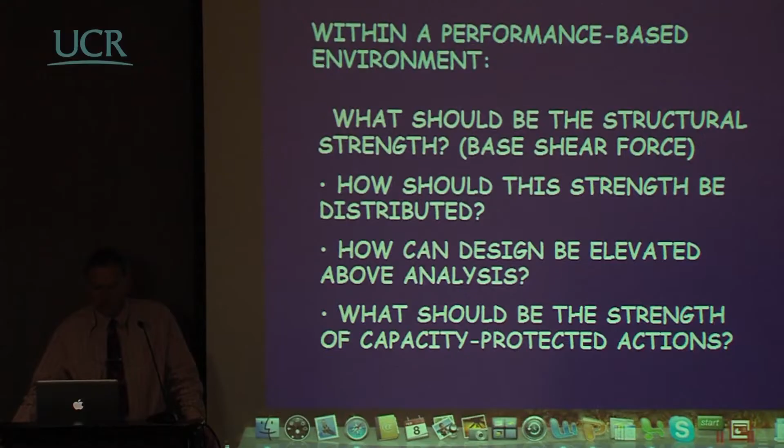So the title, of course, we have here. Essentially what we're going to be discussing is that within a performance-based environment, what should be the structural strength, the base shear strength, if you like, of a building, and how this should be distributed through the structure in a way that is different from what we do at the moment, but which creates the best seismic performance.

How can design be elevated above analysis? Because there has been a trend in the last 30 or 40 years, with the advent of such powerful computers as we use at the moment, for the design to be governed by analysis, which is completely the wrong way around. Analysis should be used to verify designs which come from a logical interpretation and from the experience of the designer, and not be dictated by analysis, which, as we will show, generally cannot be done adequately at the start of a design because we do not have sufficient information.

Also, we need to discuss how the strength of capacity-protected actions should be done. In other words, we will talk quite a bit about recent developments in capacity design. This is ensuring that you don't get plastic hinges forming where they should not form, and ensuring that undesirable inelastic modes of deformation, such as shear failure, should not occur.

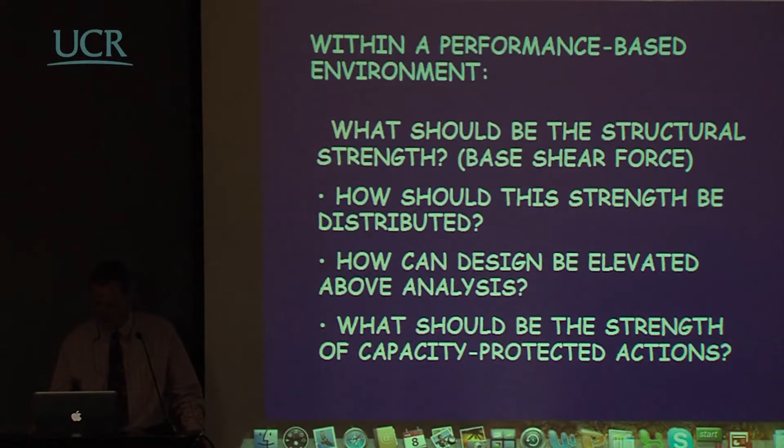And the basis for this is a book which has recently been written, in which Michele and myself are the principal authors, but I would also like to acknowledge the contribution of our co-author, Professor Kowalsky from the University of North Carolina, who really should be the one here because he speaks Spanish, and then we wouldn't have to have the translations.

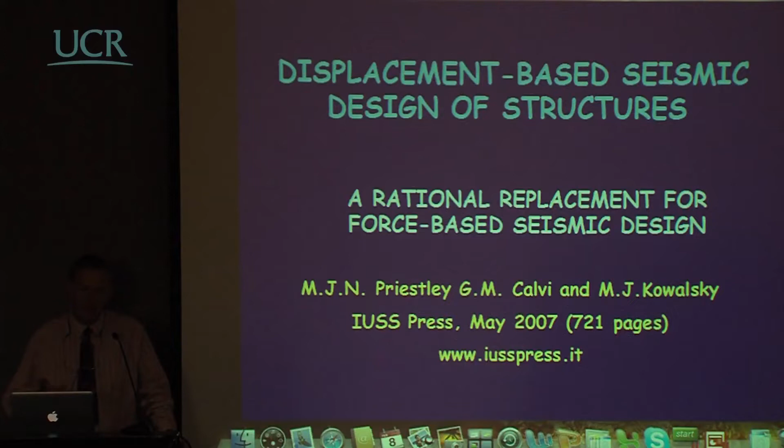Anyway, this book is a fairly major book. To my mind, it's the most important book that I have been involved with, because of the way in which it describes a complete new process for seismic design.

This first session is introductory. I'd like to give a brief overview of the book itself, what the chapters are, because we will not have time in the presentation to discuss the entire book. But I also want to spend this session discussing what's wrong with the way we do seismic design at the moment, to look at some of the assumptions we make, and to try to persuade you that these assumptions are invalid and can result in very great inaccuracies in our design.

So the book itself is a culmination of more or less a 15-year research effort into the development of a new, rationally based, but particularly simple seismic design procedure. By simple, I mean it's more or less equivalent to the old equivalent lateral force single-degree approach that we used in force-based design. A single degree of freedom system, but not one where we lose any accuracy, because we describe the response by the fundamental inelastic mode of response.

It's performance driven. In other words, we describe the performance in terms of limit state strains or limit state drifts, and design the structure to achieve those particular limits, which might be serviceability limit state, damage control, failure, whatever you like. It covers a wide range of structural types, as you'll see shortly, and a wide range of structural materials: concrete, steel, masonry, timber, precast.

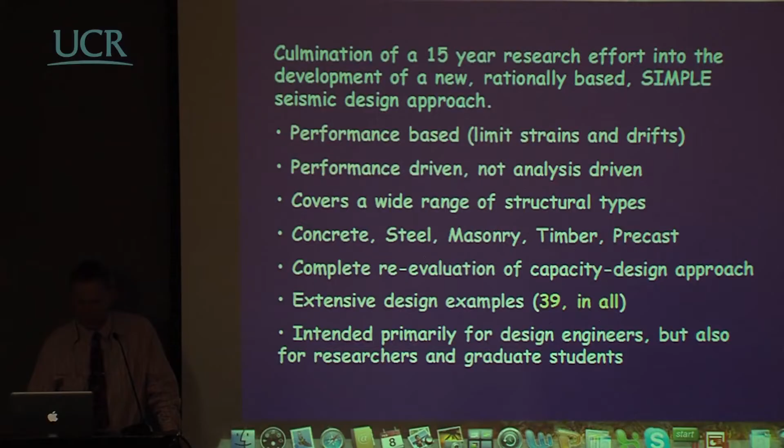I'll briefly go through each chapter, just showing what it has in it in a very brief sense. Chapter 1 is an introduction, which discusses the problems with force-based design and establishes why it's necessary to change from current force-based design processes.

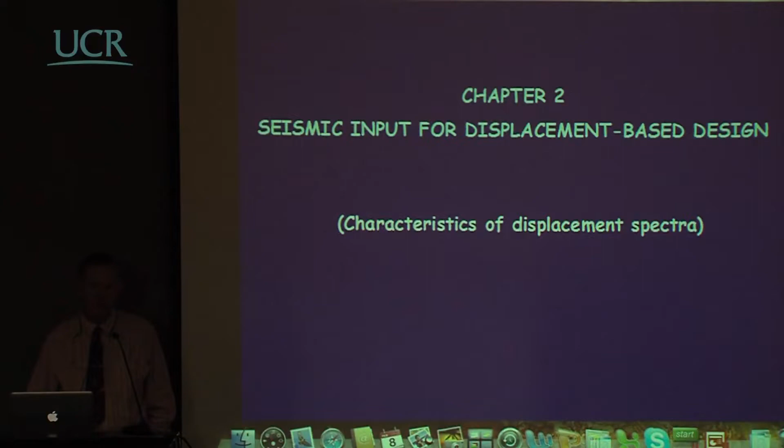Chapter 2, discussed in the second session, looks at the seismic input for displacement-based design. We don't use acceleration spectra, we use displacement spectra such as these. They tend to be very simple in form, but we'll show that we can develop these directly from source mechanisms rather than necessarily the way we have them in codes.

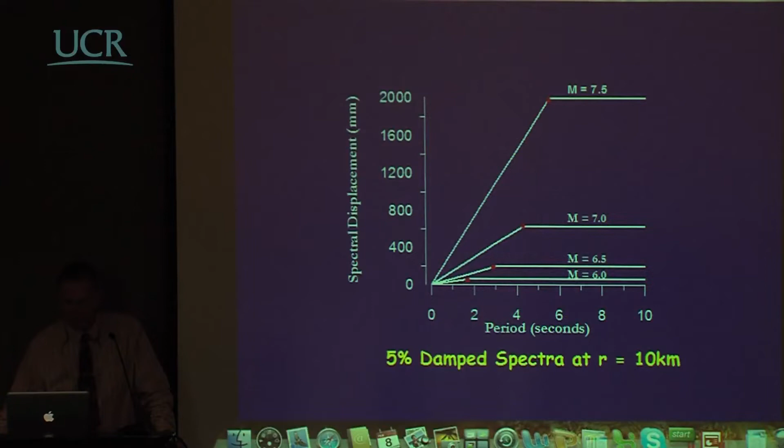This shows different spectra for different magnitudes of earthquakes at 10 kilometer distance, and you can see there's a very great deal of difference in the displacement spectra for a magnitude 6 and a magnitude 7.5.

We'll also look at the influence of viscous damping on this, because we describe structural performance in terms of equivalent viscous damping rather than just ductility. We have differences between the displacement spectra for what we might call normal conditions and other ones where forward directivity and velocity pulse conditions govern.

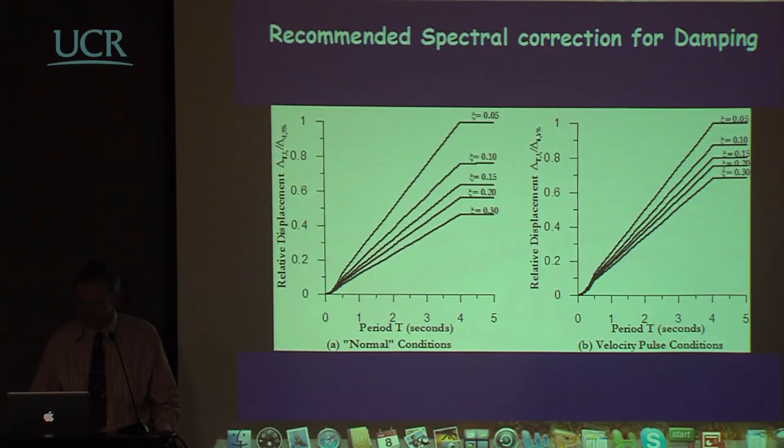Chapter 3, also dealt with in the session, looks at the fundamentals of the procedure itself. It sets the mathematical and logical background for direct displacement-based design and discusses philosophical differences between the force-based and displacement-based approaches.

There's a lot of additional information about things such as P-delta effects, how we combine gravity and seismic loads—and I hope to persuade you that we don't need to combine them, we can design for them independently—and various other aspects such as torsion and capacity design principles.

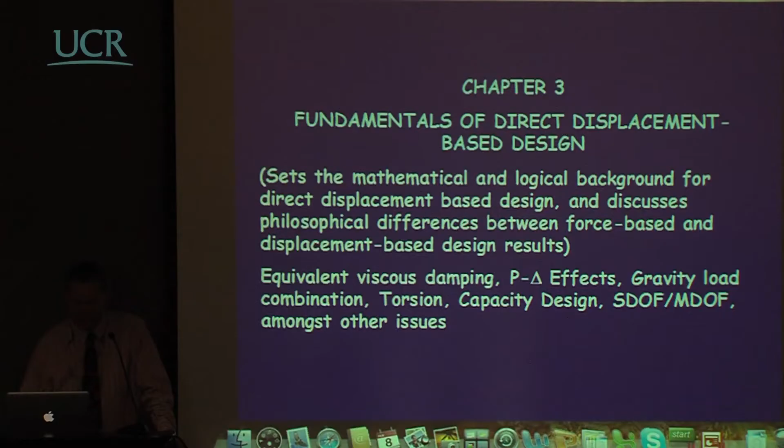Chapter 4, which we'll discuss a little at the very end of the seminar, deals with analysis tools for direct displacement-based design. One thing I should emphasize is that the book, for those of you buying this, also comes with a CD at the back.

The CD has a number of computer codes on it for different types of analysis: a program called CUMBIA, which does moment curvature analysis, and two dynamic inelastic time history analysis programs, Ruaumoko and SeismoStruct. These are quite valuable to design engineers because they enable you to do quite complex structural verifications if you need to.

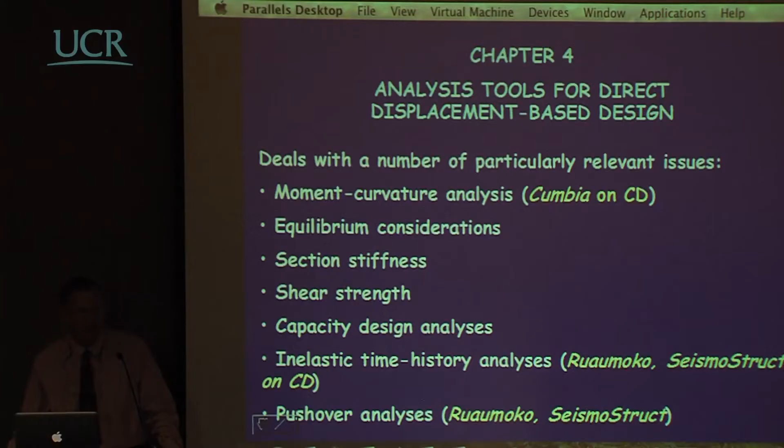We'll look particularly at equilibrium considerations, tending to use equilibrium rather than stiffness-based structural analysis to determine the distribution of forces. There's not much point doing a stiffness-based analysis at the start of a design when you don't know the stiffness of the members, and anyway it distributes forces through the structure incorrectly if based on elastic analysis when the structure is responding inelastically. Also information on shear strength and capacity design and so forth.

Chapter 5 is a detailed chapter on particular aspects of frame buildings that might be of interest to the designer, and we'll talk about that in the first session tomorrow morning.

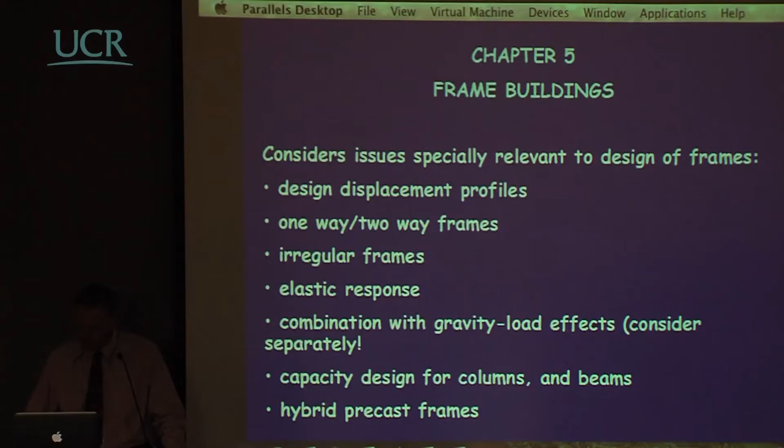One of the things we will look at is structures which might respond elastically to the design level earthquake. We'll show that from a displacement-based point of view, particularly in regions of moderate seismicity, many structures can be shown to respond elastically to the design earthquake no matter what strength you put into them. This can simplify design.

This diagram compares yield displacement, shown by dotted lines, of frame structures of various heights with the designed maximum displacement for earthquakes of different peak ground accelerations generated by different moment magnitude earthquakes.

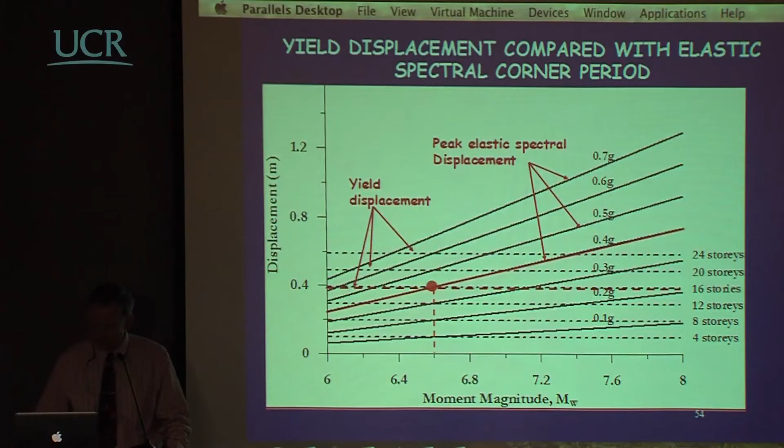A little time will also be spent on coupled wall design, an aspect of structures which cannot be dealt with adequately by elastic analysis. The results you get from elastic analysis of coupled wall structures have no bearing on what is going to happen to the structure when subjected to the design level earthquake. Whereas by displacement-based design, we can come up with a very logical structural system that performs very well.

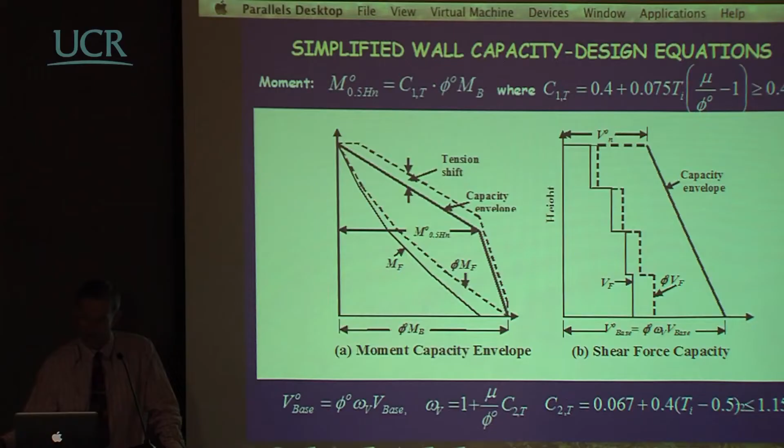Part of the aspect is re-looking at capacity design equations, here shown for moment capacity and shear force, and we'll show that in order to protect against shear failure in structural walls, we have to be a little bit more careful than we have been in the past.

We also deal with dual wall frame buildings. We'll spend a little time on this. The behavior is very similar to that of coupled wall buildings, and pretty much the same aspects are considered.

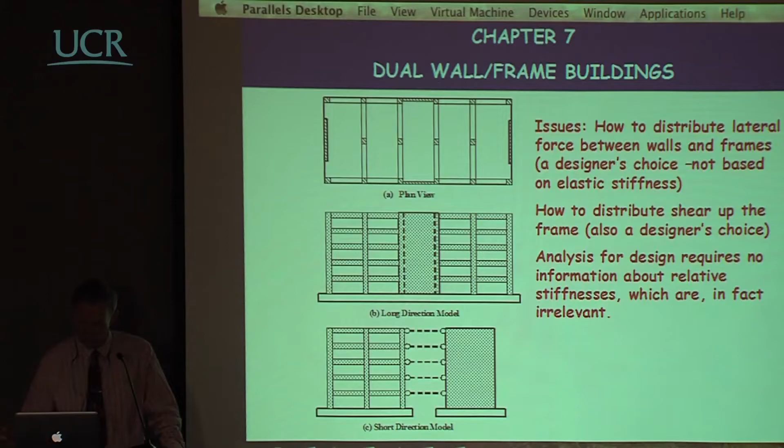The most important thing in both of these cases is that the designer, at the start of the process, makes a conscious decision about what percentage of the lateral force is going to be carried by the walls and what percentage taken by frames. It's not something you can get logically from a structural analysis, but there is no reason why you shouldn't make your own decision about this based on experience.

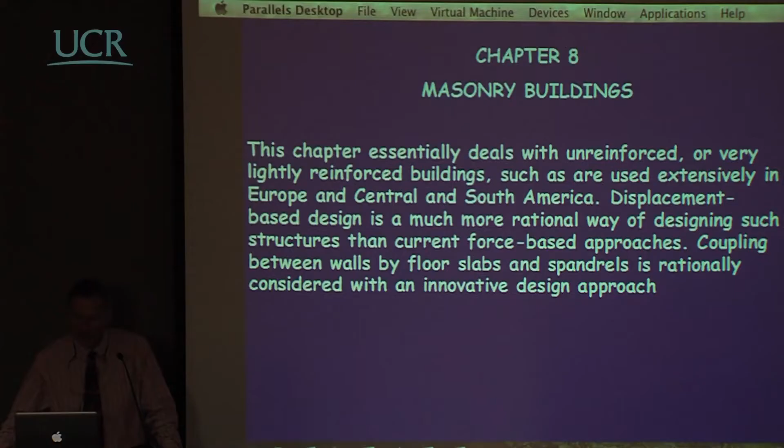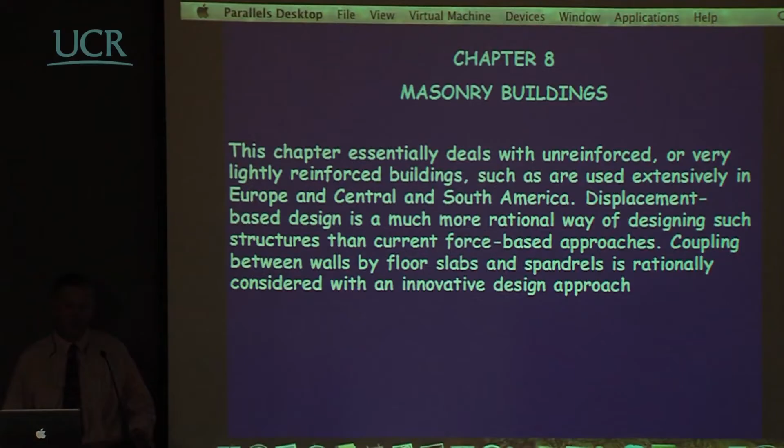Masonry buildings, this chapter deals essentially with unreinforced or very lightly reinforced buildings, such as extensively used in Europe and Central and South America. It's shown that displacement-based design is a much more rational way of designing such structures than force-based considerations. The coupling between walls by floor slabs and spandrels is rationally considered with an innovative design approach, which again is very simple but not based on stress or force considerations.

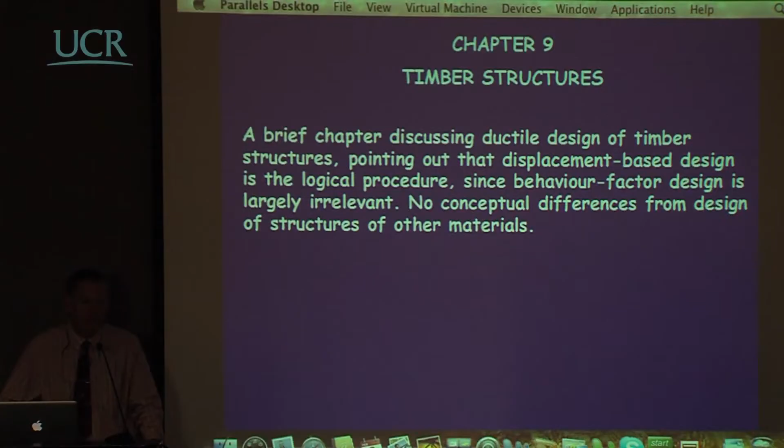Timber structures, a brief chapter discusses the design of timber structures, pointing out that force-based design is completely inappropriate because of the hysteretic characteristics, whereas displacement-based design is very simple for such structures. We show different types of structural systems that might be of interest, and we'll come back very briefly to this in a final session.

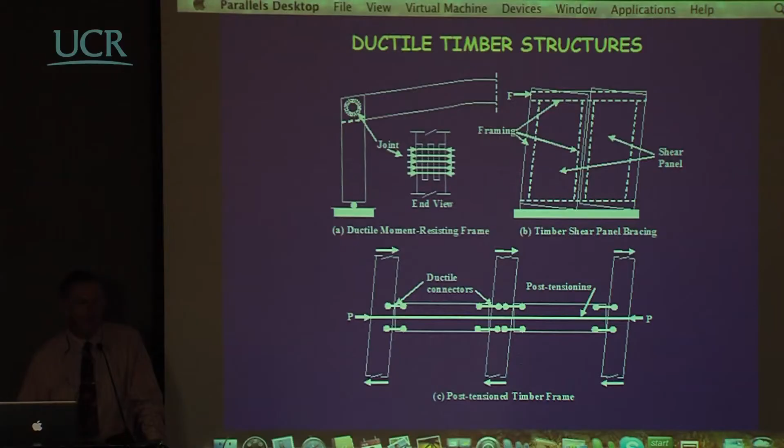Today's session is primarily on bridges, though in the introductory sessions in the morning we will be talking about buildings as well as bridges. But there's a major chapter on the use of displacement-based seismic design for bridges, looking at longitudinal versus transverse design.

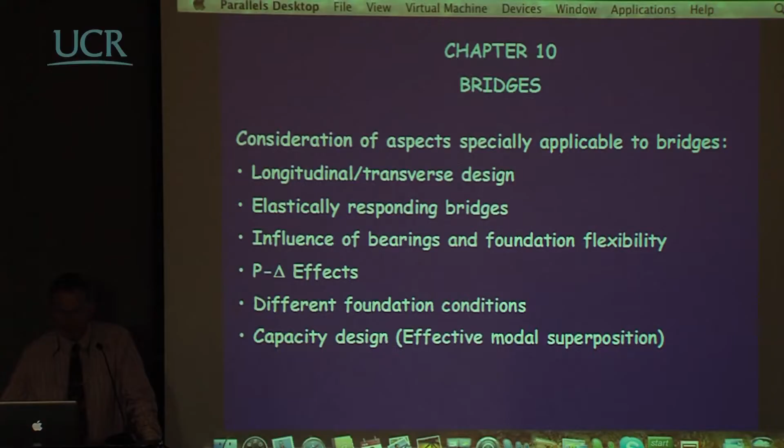Elastically responding bridges, influence of bearings and foundation flexibility and the damping associated with these, and how we incorporate those into displacement-based design, which is simple and rational but can't be considered correctly in a force-based environment. Also P-delta effects, which are very important for bridges, different foundation conditions, and capacity design.

One of the aspects we have to look at from the start is the expected displaced shape, the characteristic mode shapes of the inelastic first mode of deformation. We'll come back to this later in the day, where we see different support conditions and different relationships between the flexibility of the superstructure and the piers resulting in different inelastic displacement shapes.

Chapter 11 deals with structures with seismic isolation and added damping. Essentially, though it hasn't been recognized, even in the United States, displacement-based seismic design has been used for the design of such systems for some years, because it's impossible to design a structure which has an initial stiffness governed by structural elements and perhaps seismic fuses, and then has seismic isolation, by force-based considerations. Michele will be spending some time on this in the afternoon sessions tomorrow.

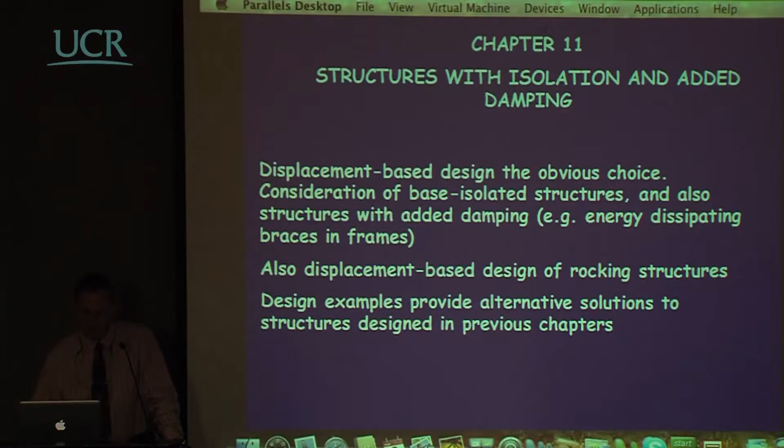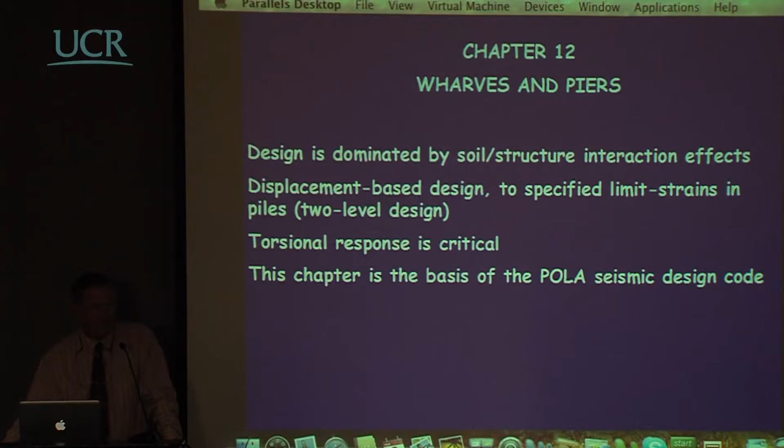Some idea of the different types of structures that might be considered, which we'll look at in more detail later. There's a chapter on wharves and piers, because these structures, particularly a marginal wharf with piles of different heights, are very difficult to design rationally by force-based design, but displacement-based design works very well for them. It's not something we'll deal with in this course, but it has been considered important enough that the Port of Los Angeles has adopted a displacement-based seismic design code, which I've helped them develop over recent years.

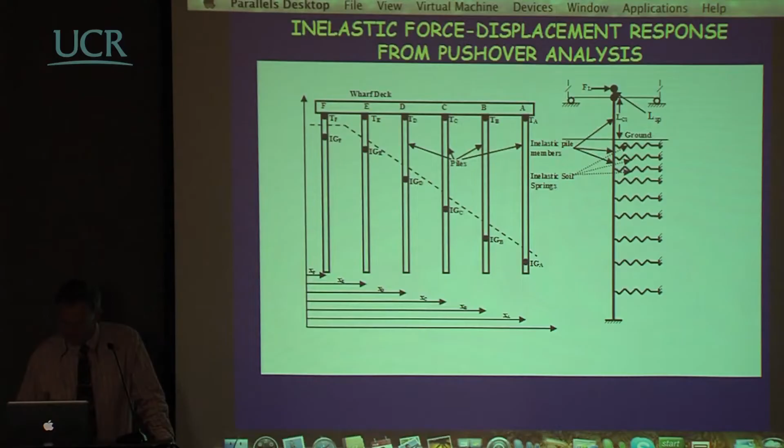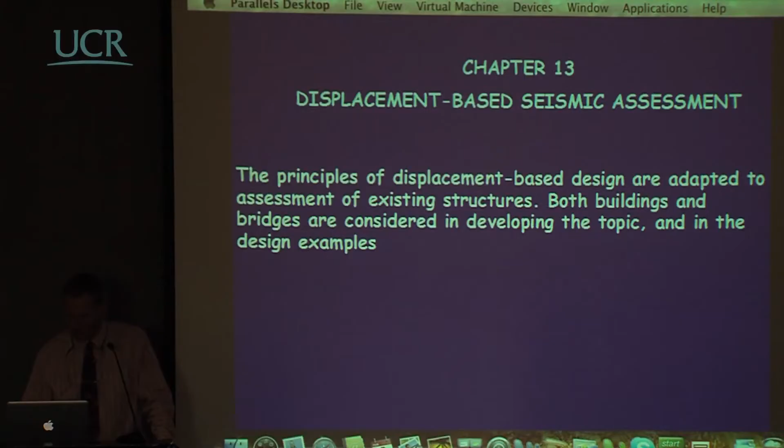There's a chapter on displacement-based seismic assessment. It's a procedure that can be used efficiently for assessing existing structures as well as for design of new structures, though we will be concentrating primarily on new design. We'll look at different examples associated with seismic assessment.

Finally, the last chapter is a draft displacement-based code for seismic design of buildings. Just a very simple document to show what sort of code clauses might be used to incorporate this into design codes, intended as a starting point for the development of seismic codes. We'll talk again a little bit more about this later, at the final session, where we discuss how we can get this going as a design procedure.

Let's start looking at what's wrong with the way in which we design structures for earthquakes at the moment. First, just a little bit of background information.

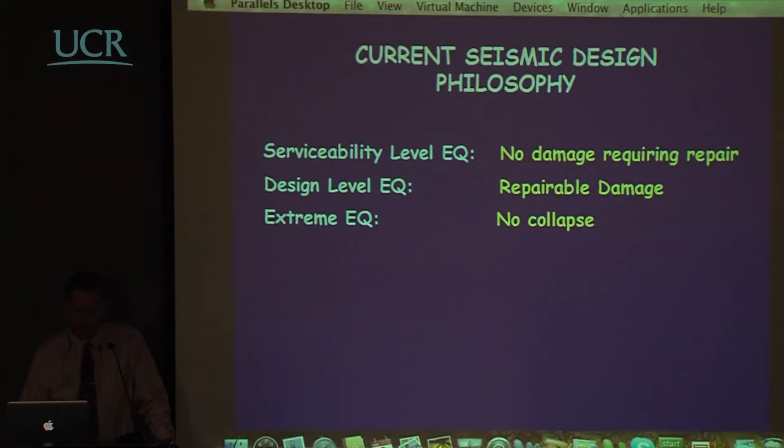Current seismic design philosophy is generally developing towards a multi-performance level consideration: under the serviceability level earthquake, defined by probabilistic characteristics, there should be no damage requiring repair; for the design level earthquake, repairable damage; and under some extreme earthquakes, there should be no collapse. To my mind, designing for three different levels is a little inefficient, and generally it will be sufficient to design for the design level earthquake and maybe do some checks for the others. But it's becoming common in the United States to be required to design for an extreme near-collapse level of earthquake, and FEMA is requiring that. I don't really like this, because I think it's very difficult to define that near-collapse state with much accuracy for structures, whereas the repairable damage state we can.

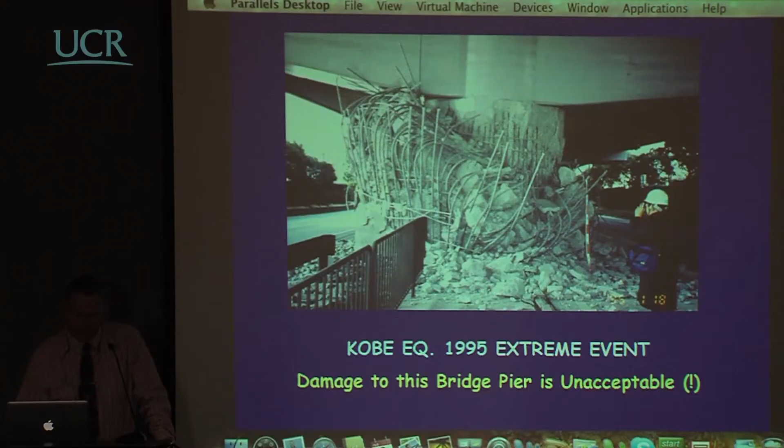Let's start looking at the problems with force-based design. Structural damage, which is related to performance level - no damage, repairable damage, near collapse - is strain related. It depends on the strains in the material, not the forces. For example, with reinforced concrete, we know the cover concrete in a plastic hinge region will start to spall at a strain of about 0.004. We have equations that give us safe limit strains for repairable damage of concrete. We know that if the maximum strain in reinforcing steel during an earthquake exceeds about 1.5%, we're likely to end up with residual crack widths that require repair. So in each case these are strain-related aspects, and we can define a performance level for a structure in terms of strains.

Non-structural damage, particularly in buildings, is generally related to drift - the displacement of one story relative to the story below. Things like mechanical connections, partitions, and other non-structural aspects in a building tend to get damaged when drift exceeds a certain level. Now, both the structural aspects (strain) and the non-structural aspects (drift) can clearly be integrated to get displacement of the structure, if we know how that's distributed. So performance levels can be directly related to displacement.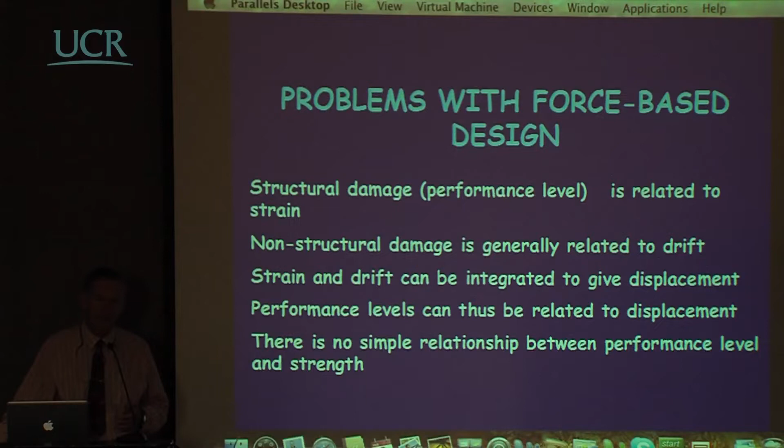Whereas if you try to make a relationship between performance level and strength or forces, you cannot do it. There is no such relationship, and I'll show later on in this lecture that force or strength is a very poor indicator of the damage potential of a structure. We'll come back to that.

If we look at design to elastic acceleration spectra, which is the current way in which we do design, which I call force-based design, the assumptions are that elastic force levels, which are dependent on initial stiffness, are of prime importance. We say that the elastic stiffness is known at the start of the design. We don't. The elastic forces we assume can be reduced by performance factors such as behavior factors or force reduction factors related to the ductility capacity, which are dependent on material and structural type. So we assume that for a given structural type, there is a particular force reduction factor or behavior factor that we would use that is unique for that structure, regardless of its geometry. We can show very simply that that's invalid.

We assume that the maximum transient response is the issue rather than residual displacements, and that is not necessarily the case. We assume that the maximum displacements of an inelastically responding structure are well estimated by the elastic response values dependent on the initial elastic period, which we don't know. And this is also invalid. We assume that safety is increased as the strength is increased. And this may be almost true, but it is such a tenuous relationship between strength and safety that it is not worthwhile considering.

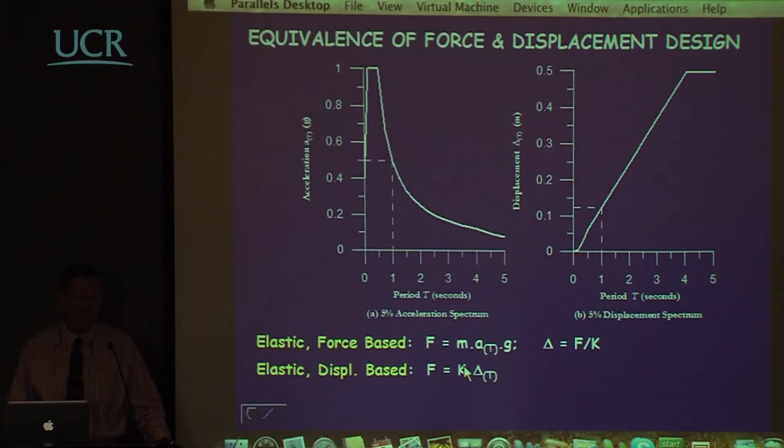Well, if we wanted to do this from a displacement point of view, instead of using the acceleration spectrum, we would use the displacement spectrum. We would again enter with the known period, and directly from the displacement spectrum, it would tell us what the displacement response is. So we've got that piece of information immediately. And to calculate the required strength, we would just multiply that by the stiffness, K, and that would tell us the force. And of course, the force and the displacement would be the same regardless of which procedure you used.

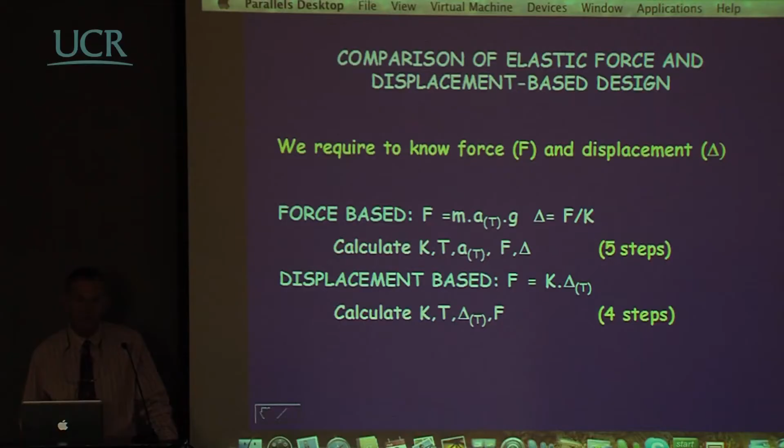Looking at that again, then we would say that we're required to know both the strength and the displacement for design. Force-based, the procedure is what we have shown there, and you can see there are 5 steps to do this. First, we calculate the stiffness. From the stiffness, we calculate the period. From the period in the acceleration response spectrum, we calculate the acceleration. From that, we get the strength, and from the strength, we get the displacement. For the displacement-based approach itself, the procedure only requires 4 steps. We calculate the stiffness, the period, we read off the displacement, we multiply by the stiffness, and that's the force. So it's actually a little bit simpler than using the force-based design, but there's nothing magical or nothing complex about using a displacement spectrum rather than an acceleration spectrum.

Structural modal analysis, I hope to persuade you that the way in which we do this doesn't make any sense. We're very familiar with it and the way we combine modes, and we think that because we're using a larger number of modes than we would use for an equivalent lateral force procedure, we're getting a better approach for the design of a structure.

In terms of considering the higher modes themselves, typically what we will do is calculate the participation of each mode, calculate, for example, the base shear associated with each mode, and then combine them together according to either a CQC or a square root sum of the squares approach to find out what the base shear would be, and then we would divide that by the force reduction factor appropriate for that structure.

Now, in doing that, it's completely wrong because the inelastic response is only related to the first mode, and we should not be reducing the magnitudes of the higher modes by that force reduction factor. So by the procedure we use at the moment, we are not considering the higher modes adequately. We'll show you that in relation to wall structures tomorrow in the second session of the morning.

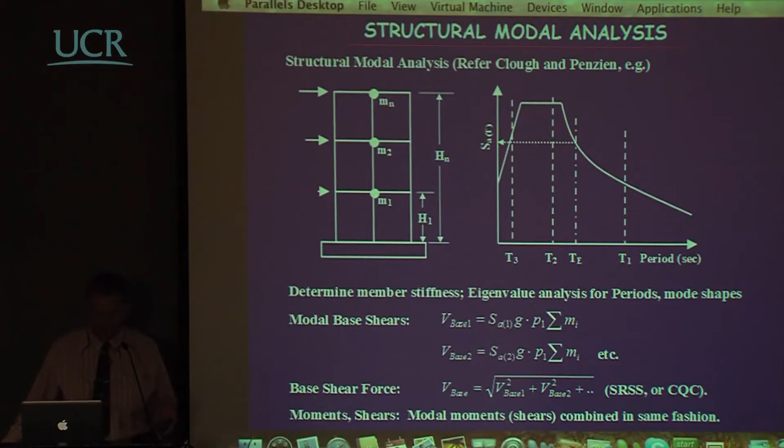So, problems with force-based design as we see it. First, in design, we assume the stiffness of a structure - the architectural design comes on, we size the particular structures, the elements, and then we say, right, we know the dimensions of the particular members, therefore we know their stiffness. Wrong. We don't know what the stiffness is until we know what the strength is.

Period calculation is based on inaccurate estimates of the stiffness, because we don't know the stiffness at the start of the analysis, or we use height-based equations which are ridiculous and out by at least a factor of 2 for determining what the period is.

Ductility, capacity, and force reduction factors - these aspects have some problems which we'll look at. Ductility of structural systems are not unique for the structural system, but depend on the way in which the geometry of that system is there. We'll look at some of these aspects here.

Structures with dual load paths, we'll show, particularly for bridges, is a problem. And the relationship between elastic and inelastic displacement demand - typically we use approximations such as the equal displacement approximation, or we use the equal energy approximation depending on what part of the world we're in, and we show that we really don't know what to use for that.

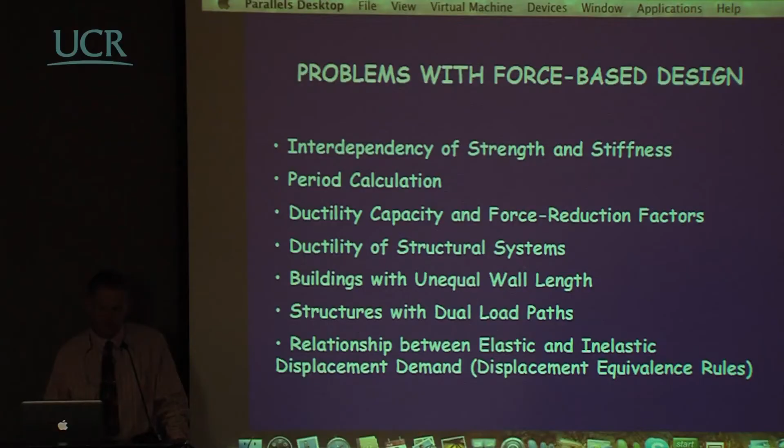And if we don't know, and if we at the same time recognize that displacement is the most important part of the structural response because it's related to damage, then it's pretty bad what we're doing in our design.

Let's look at force-based design and the interdependency of strength and stiffness. Typically in the design, the member sizes are assumed at the start of the design process - we always have to do that no matter what procedure we use. Then the member stiffnesses are assumed. In some codes, we use the gross or uncracked stiffness if we're talking about reinforced concrete or reinforced masonry.

In others, perhaps we use 50% of the gross section, or maybe we have a more sophisticated code which provides some variation depending on the type of structural element - a beam might have 35% of the uncracked stiffness, or a column might have 70%. But there are still assumptions which are independent of the strength.

The periods are based on these assumed stiffnesses, and you can see in a typical case, if we compare the difference between an assumption of 35% I gross and uncracked section properties, the design forces can vary by 40% at least, which is a pretty coarse approximation.

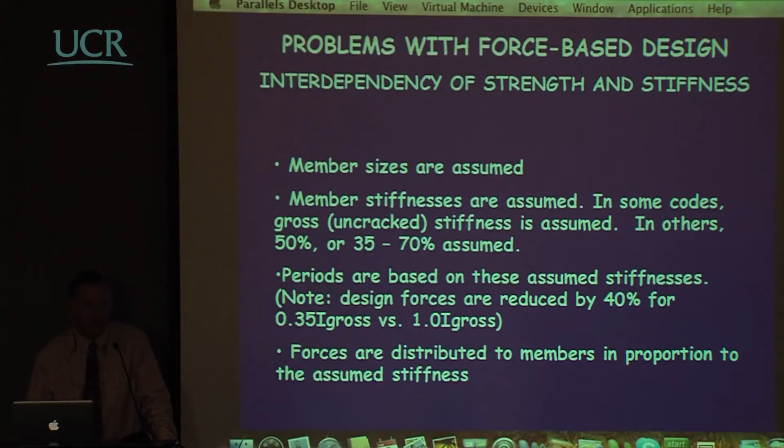And then one of the things which is particularly bad is that we distribute the forces through the structure to members in proportion to this assumed stiffness, which is invalid. Well, is it really invalid?

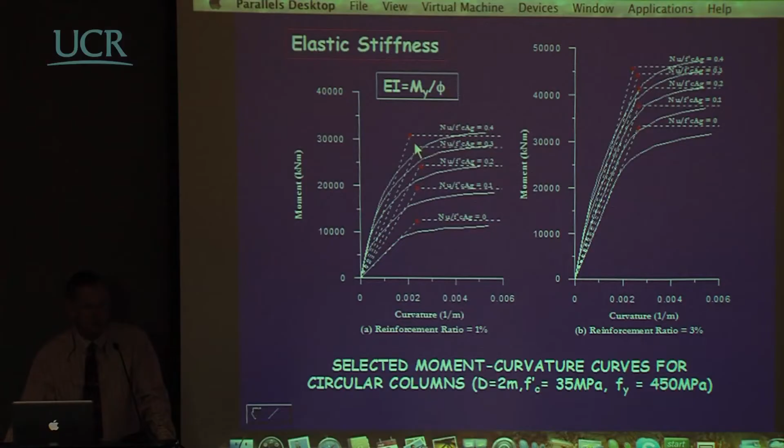If we look at that in more detail, what we see on the left-hand side is the dimensionless nominal moment of the section—that's the moment we might use for design. As we change the axial load ratio or the flexural reinforcement ratio, we change the moment capacity greatly. In fact, it could vary anywhere between a value of 0.02 up to 0.18—about 9 times variation in the moment capacity going from one to the other.

Whereas if we look at this side here, what we see is that the yield curvature in all of these cases varies by less than 10% of a constant value.

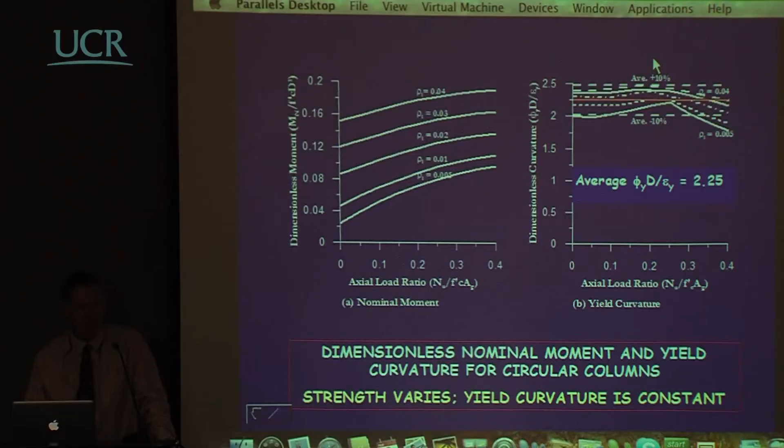So in force-based design, if we combine these things in terms of stiffness—if we divide the appropriate nominal moment by the yield curvature, which gives us the stiffness, and express that as a ratio of the uncracked stiffness for this same section, the dimensions have not changed—the stiffness ratio can vary between 12% of the uncracked stiffness up to 90% of the uncracked stiffness.

And in design, we assume that there is no variation. We assume that it's a constant value. Now, what's the point in doing a very sophisticated computer analysis to govern the design when you use a stiffness value which can be out by a factor of 2 or so? There is no point, and you're not doing the right sort of thing.

We need an analysis procedure which is not dependent on the initial stiffness. Either that, or we have to do an iterative process—a design where we assume what the stiffness is, calculate it, distribute the strength through, recalculate the stiffness, and do another analysis until we get to stability. And if you're going to do that as a design engineer, you're going to lose a lot of money because you're going to spend too much time.

What I would like to emphasize again on that basis is that the stiffness is not a constant value, but the yield curvature for a particular section is independent of strength within a very small margin. We'll come back to that again.

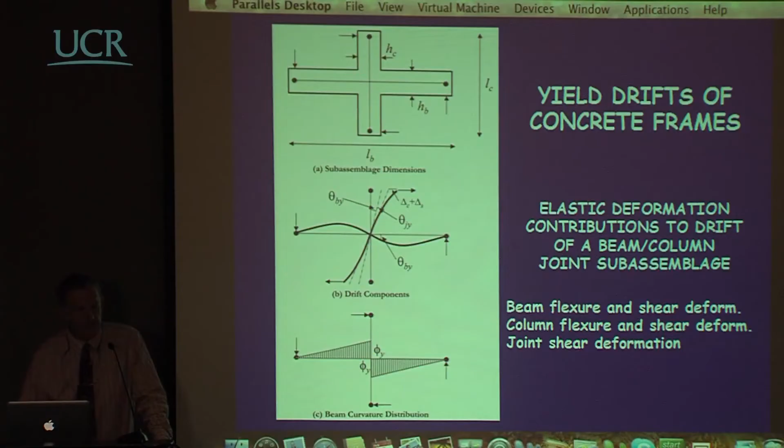Now, there's a lot of things that should be incorporated in this that we haven't included. For example, if we compare this against experimental data from a data set of about 45 beam column joints, variables include the column height to beam length aspect ratio, which is not included in that expression, the concrete compression strength, not included, beam reinforcement yield strength, that is included because that's the yield strain, maximum beam reinforcement, not included, column axial load ratio, not included, and beam aspect ratio, that's another one included.

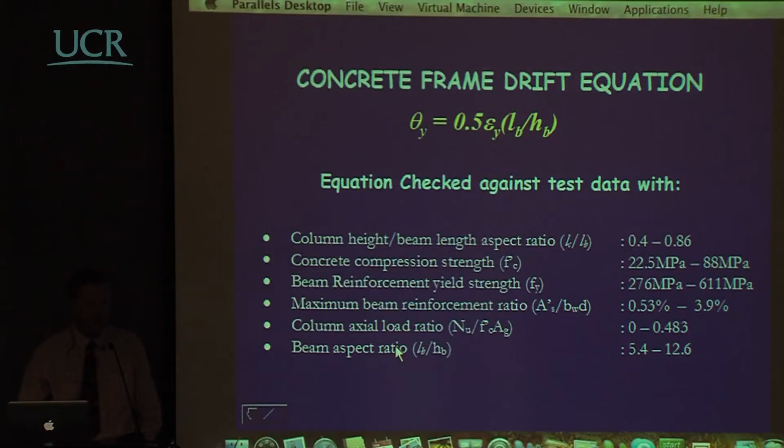So a lot of things are not incorporated in there, but when we look at how that fits the data, that simple expression, you see it's pretty good. Here's the theoretical drift ratio versus the experimental drift ratio, with experimental data from test results in the United States, New Zealand, and Japan in particular. There's only two data points that don't seem to fit very well, and these are from American data where the beam reinforcement slipped through the joint even before yield. So the actual coefficient of variation is about 13%, and the average is very close.

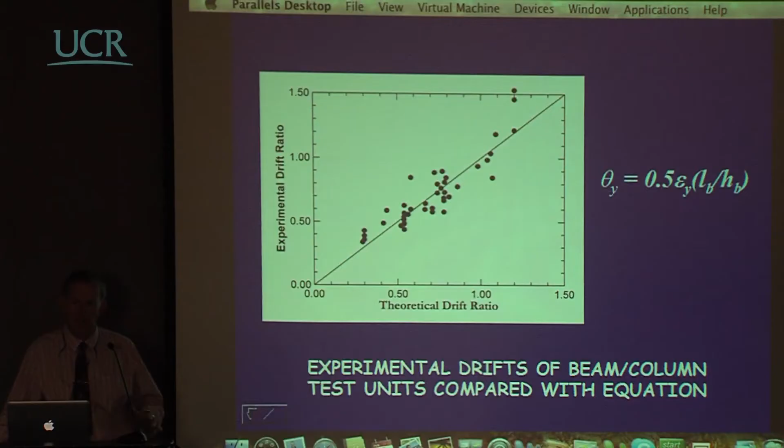So what use is this? Well, in force-based design, absolutely nothing. It's no use to you to know what the yield drift is. But in displacement-based design, as we will show, this is a critical piece of information. Because if we know what the yield drift is, and we can determine what the limit state drift is for the structure, then we know immediately what the ductility demand on that structure is, and we will know this before we have any idea of the strength. So we'll know the ductility demand of the structure for a performance level before we have any idea of what the strength is, and that is extremely useful to us later on in this procedure.

It's also worthwhile to look at steel structures, because people say, well, concrete is a difficult material. If we're doing a steel design, of course we know what the stiffness is, it's elastic, there's no problems with it. But of course that's completely wrong, because you don't know.

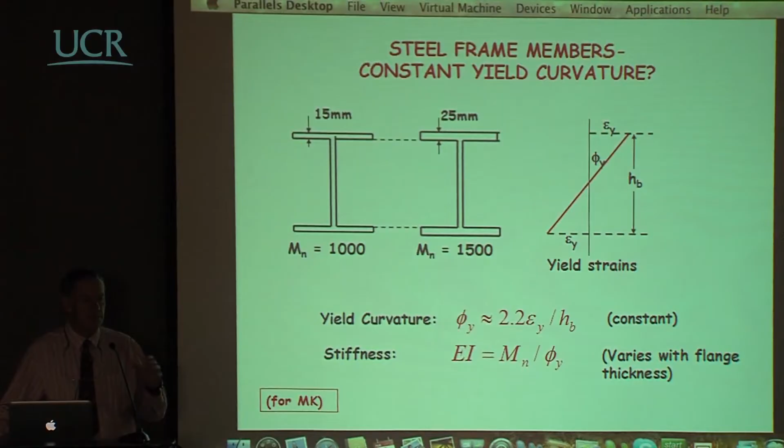When you put in your steel design, you typically are deciding on a depth of the steel members, say the beams itself, but you have a variety of possible flange thicknesses that you will choose. Once you know what the required strength is, you'll choose the flange thickness for that particular class of wide-flange beam, and determine the strength. But in doing that, you change the stiffness as well. If you change the thickness of the flange, you change the strength and the stiffness in direct proportion. So you start off with an assumption of the stiffness, put in the strength, which changes the stiffness. You do another analysis with a new stiffness, it changes the required demand because the period changes, you need new stiffness, new strength, and so forth, and it goes through.

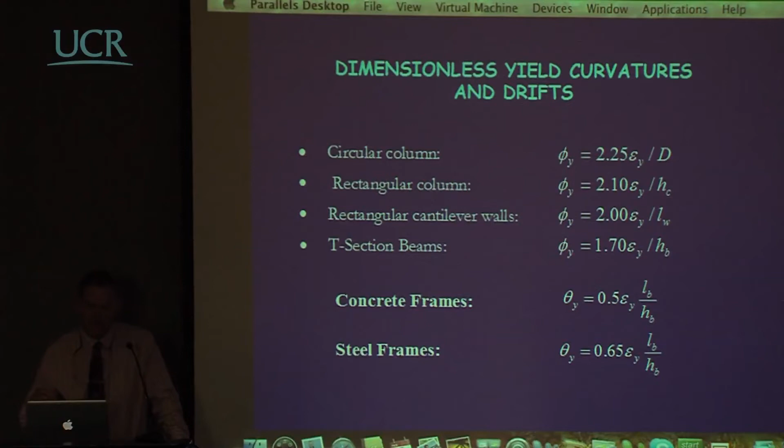But you don't, in a steel structure, have any more idea of what the stiffness is than you do in a concrete structure. The point of this is to emphasize that we don't know what the stiffness of a structure is at the start of the design procedure, and therefore doing a structural analysis of great sophistication, multimodal analysis based on the stiffness, doesn't make much sense. But by doing the sorts of analyses I've briefly described, we can come up with information on the yield curvatures of different types of structural sections, such as circular columns, rectangular columns, cantilever walls, T-section beams, and so forth, where they're all of the same form.

It's some number times the yield strain of the flexural reinforcement divided by the overall section depth, D for the diameter of a column, H for the depth of a rectangular column, and so forth. Also, for concrete frames, we have an expression for the yield drift, as we've already pointed out, but we can do the same thing for a steel frame. We can determine what the yield drift is independent of the strength. So all of these aspects are independent of the strength, meaning that we can get an estimate of the yield displacement of a structure without knowing what its strength is at the start of the design process. This is important for displacement-based design, whereas for force-based design, we cannot come up with an accurate estimate of the stiffness at the start of the design process.

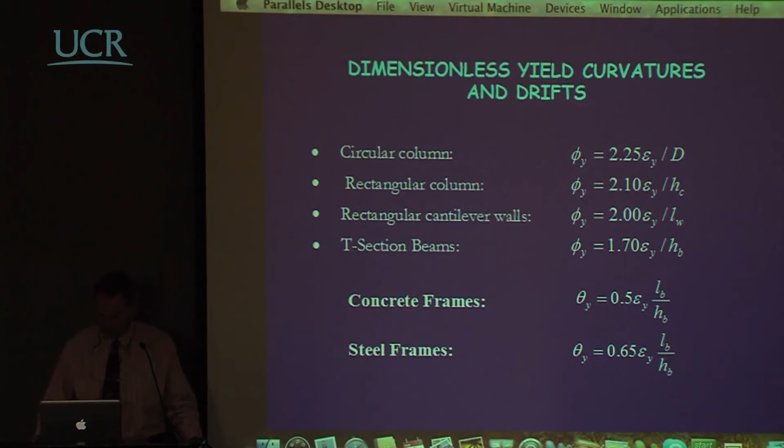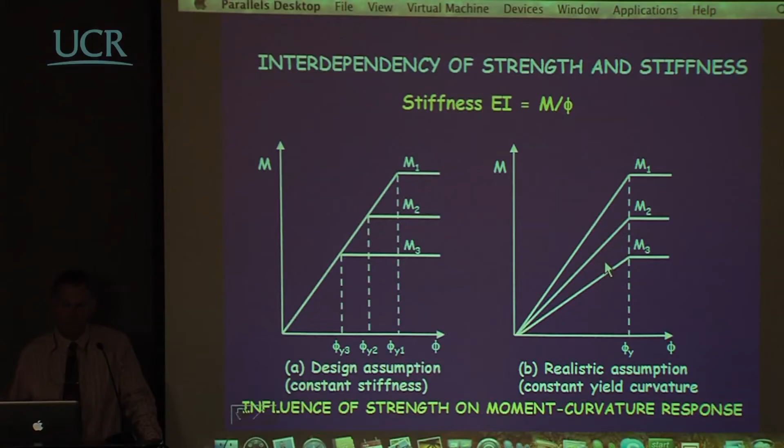It's impossible to do. But notice that what we're saying is that the yield curvature varies and the stiffness is constant. The real situation, as we change the strength, is that the yield curvature stays constant, and since the strength increases, the stiffness changes. So stiffness and strength are directly proportional to each other. They're interrelated in a way that is not recognized in our current design.

Now let's look at another problem with force-based design, and that's the assumptions of system ductility. We assume that for a particular structural system and material there is a unique ductility capacity for that class of structure, a frame structure or a wall structure, and hence a unique force reduction or behavior factor.

For example, it might be that the value used for design is a force reduction factor of 6, so this will depend on the country. And for wall buildings, maybe it's 4, and for concrete bridges, maybe it's 3. But again, this will depend on which country you're in.

So what does it tell you? It tells us that we don't know what the right relationship is between the force reduction factor and the structural class. And that's true, we don't. Different code committees have waved their arms and come up with a particular number and put it in there. But if you see that sort of variation, you must think there's something wrong with the way in which we characterize the ductility capacity.

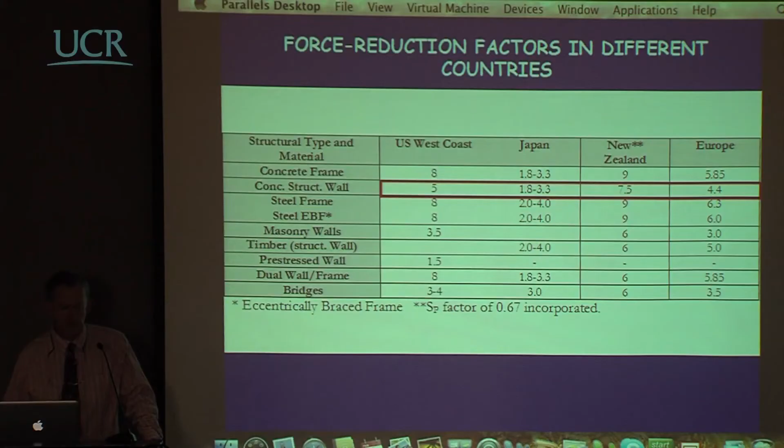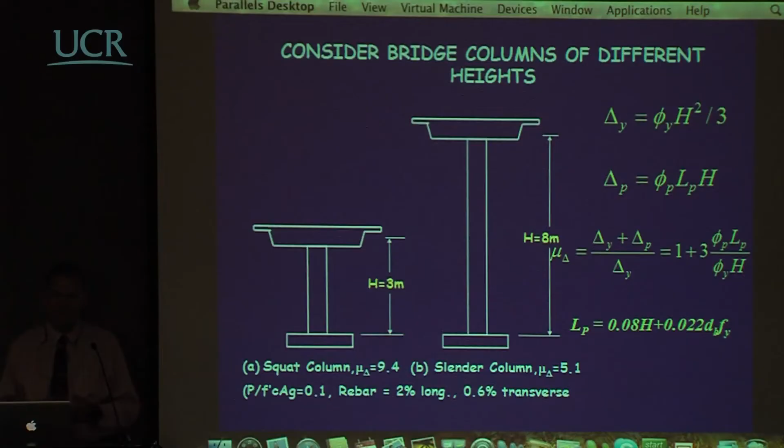So what would you use for a bridge pier? What is the correct value to use for the ductility capacity? And the answer is there is no such number. So codes which specify the behavior factor or the force reduction factor for a class of structure are going to end up with structures with different degrees of safety against damage in an earthquake, which is not a very good thing to do.

What's the design process? This is a very simple structure. It's a single degree of freedom system, if we assume that the mass of the piers is not very significant. So we would calculate the longitudinal stiffness of the structure by adding the stiffnesses of the 3 piers. Let's assume that they're fixed at bottom and also at the top, and that the superstructure is rigid in comparison with the piers, which is a good approximation.

So we would say that the total structural system stiffness is just the sum over the 3 stiffnesses of 12 EI over h cubed. All right, we can then calculate the period.

Of course, we don't really know what I is, I've already mentioned that, but we calculate the period, and then we calculate the base shear as being the elastic response for that period times the mass divided by the force reduction factor, which, as I've said, we don't know what it should be.

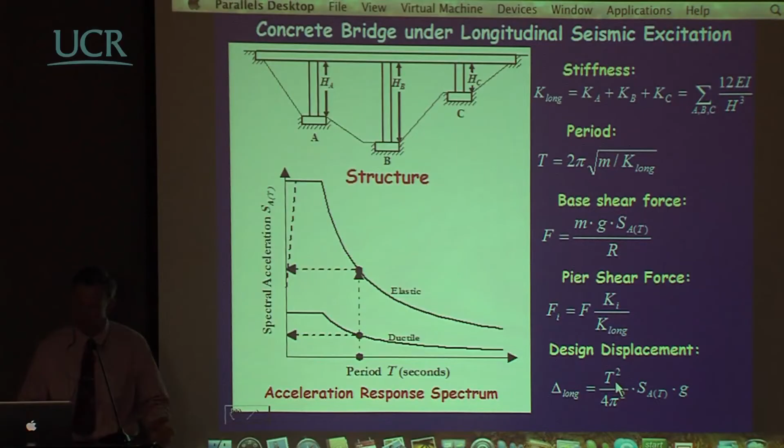We then calculate the displacement, perhaps from the acceleration response, multiplying the acceleration response by t squared over 4 pi squared, the normal way of converting from acceleration to displacement.

All right, well, let's look at the problems associated with that. We've said the stiffness, the period, and the way in which the force is distributed.

Well, the first question is, what value should we use for EI? And we said, well, the value for EI depends obviously on the strength of the elements. We've shown that it's not a constant value. When the system cracks, it's going to vary.

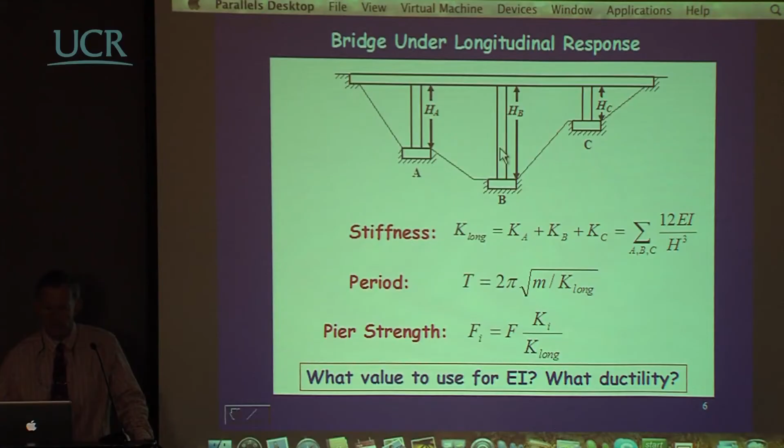What value for ductility should we use? We've shown that the codes put in a value which depends only on the structural type, but we've said that column C will have a high ductility capacity, whereas column B, which is tall, will have a lower one. But what's more, what is going to be the ductility demand on these? The displacement will be the same, but the yield displacement will be different.

The first thing we say is that force-based design with the column stiffness, let's look at what we were doing in the force-based design. The column stiffness, depending on what the degree of fixity at the top and the bottom is, there'll be some constant here. I've mentioned 12 before, times the stiffness of the element divided by the height cubed.

So initially in force-based design, we would assume the same stiffness in terms of section stiffness EI for each of the 3 columns. Then we would distribute that force to the particular columns in proportion to their stiffness, and that would mean that the shear force carried by those columns would be proportional to inverse of h cubed. The moments at the base of each of those columns would be found from the force times the height of the column, so it would be inversely proportional to the square of the height.

So a force-based design will say this short column here is going to have a very much higher moment demand than this tall column here.

All right, so if that happens, then what we need to do in force-based design, recognizing that the moment here is perhaps going to be 4 times as high as the column here if the height ratio is 2, is we'll put something like 4 times as much flexural reinforcement in this column as we would in this column here.

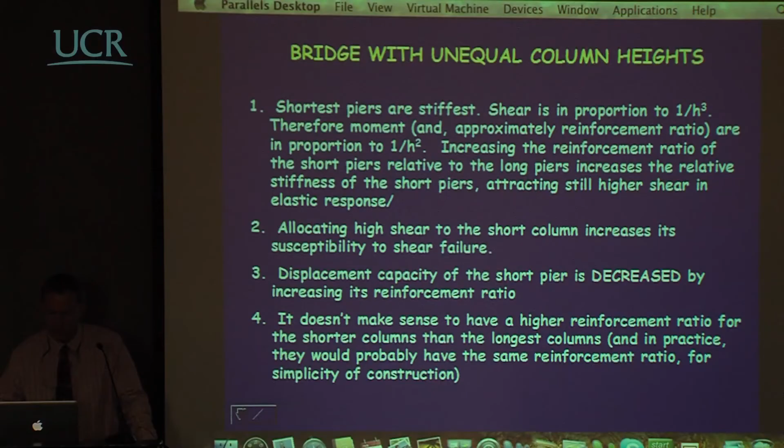What about wall buildings? We see very much the same sort of system coming into play when we deal with walls, structural systems where we have walls of different lengths. We mentioned that the yield curvature is inversely proportional to the section depth. In this case, it should be an L rather than H, and independent of the strength.

So we could characterize the behavior of this wall and this wall by force displacement response. The important thing to note is the yield curvature is in inverse proportion to the length of the wall itself. Therefore, this wall will have a small yield displacement, proportional to the yield curvature, and this one will have a larger one. There is nothing you can do about that. There is no way you can get that shorter wall to yield at the same displacement as the longer wall.

So force-based design allocates the base shear in proportion to the elastic stiffness, which is proportional to the length of the wall cubed, on the assumption that the short wall can be made to yield at the same displacement as the long wall. This is impossible, as we've said. Strength is unnecessarily and unwisely concentrated in the long wall itself.

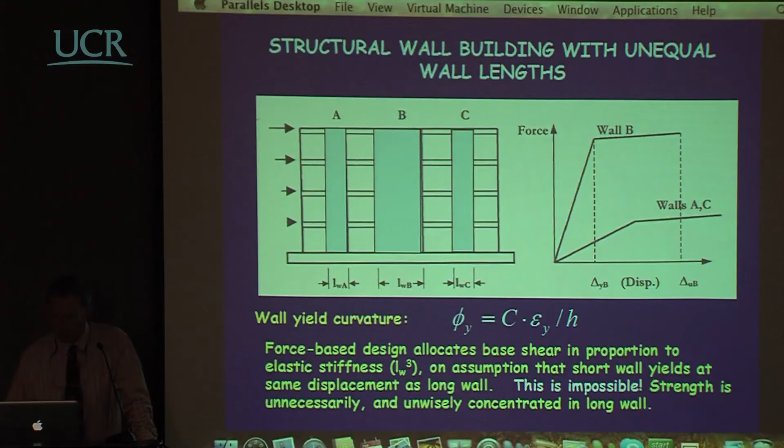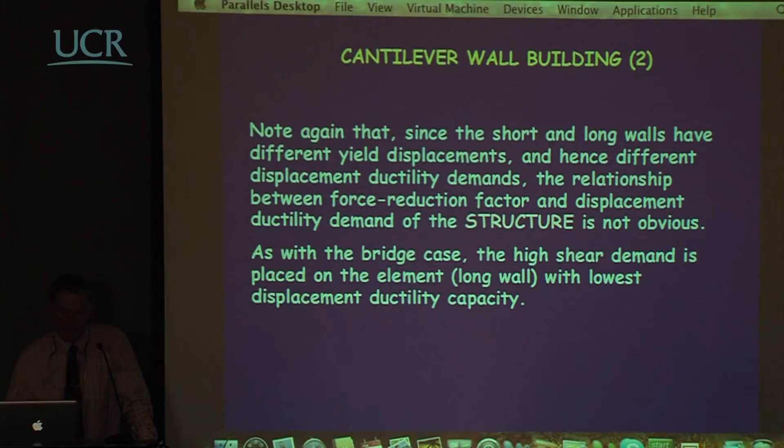We note again that since the long and short walls have different yield displacements and hence different displacement ductility demands, the relationship between force displacement or force reduction factor and displacement ductility demand of the structure is not obvious itself. As with the bridge case, we concentrate high shear demand in the element which is perhaps least capable of sustaining it.

If you use the equal displacement approximation, then you assume that the elastic displacement and the inelastic displacement are the same. Some countries use the equal energy approximation, which means that the inelastic displacement is very much larger than the elastic displacement. In the United States, they have tended to use something which is very much smaller — the inelastic displacement is smaller than the value they would get from the elastic relationship.

Now this is very serious business if we accept that the most important aspect in terms of performance of a structure is the displacement, since this is related directly to damage by strains or by drift. We see that we cannot agree within a factor of 3 or 4 what level of inelastic displacement we might have, depending on which part of the world we are.

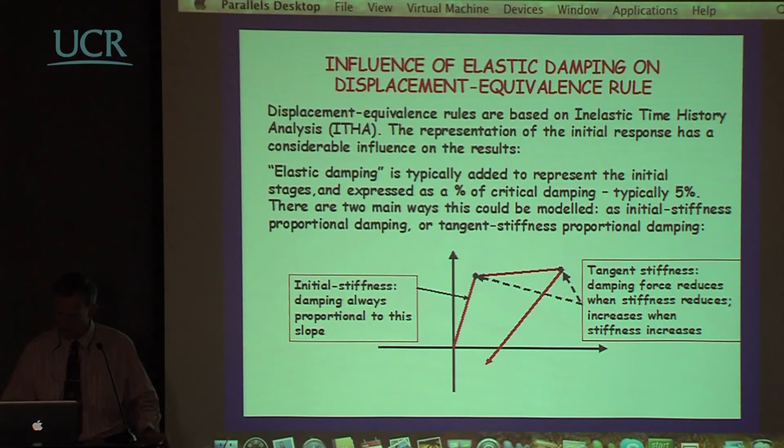So the hundreds of thousands of nonlinear time history analyses that have been used in the past to justify relationships between elastic displacement and inelastic displacement are generally invalid because they have used a completely invalid elastic damping model. I might go into that a little bit in the final section, but it's gone through in great detail later on in the book.

I mentioned earlier that there is no obvious relationship between strength and damage potential, and yet our codes tell us that if we have an important structure, we should increase the strength to make it safer. Well, high strength does reduce damage in small or moderate earthquakes, so it has some value there. It does not necessarily reduce damage in the design or extreme earthquakes. It doesn't necessarily reduce displacements.

It subjects the contents of the structure to higher acceleration. So if you're dealing with a hospital, designing it for higher base shear strength may be a bad thing because you're going to have more damage to delicate instrumentation and so forth. And of course it increases the cost.

Well, let's have a look at a very simple example of this. Again, we talk about a simple bridge column, pretty much the same example as before, where we have a 2-meter diameter column and we vary the amount of flexural reinforcement in it. We know that by varying the amount of flexural reinforcement, we will vary the strength and other parameters as well.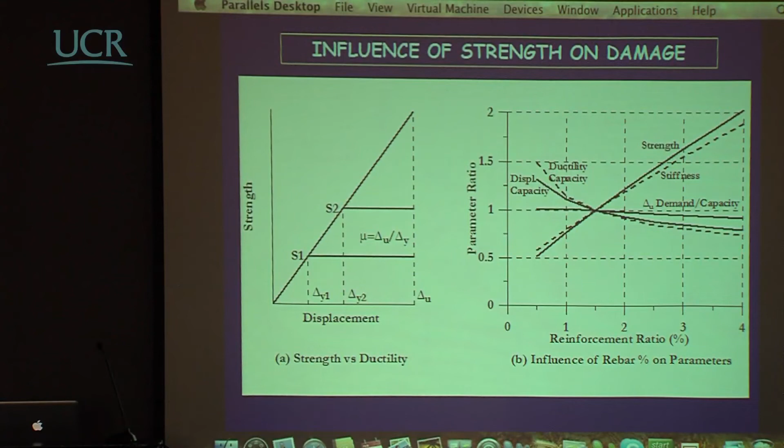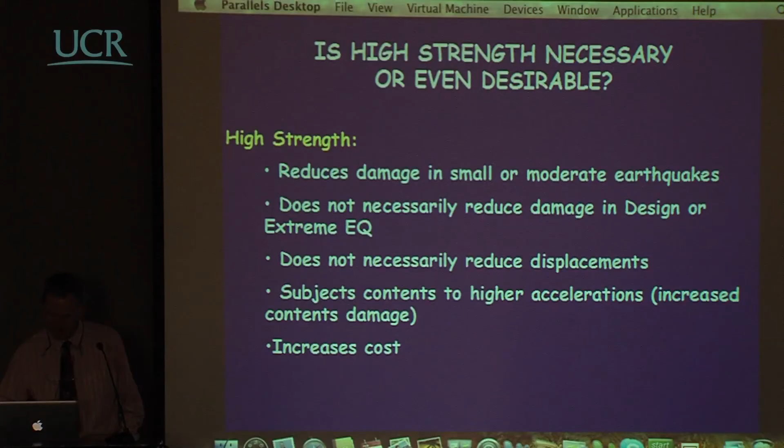So changing the reinforcement ratio increases the strength as we expect. What does it do in terms of the displacement capacity? If we do sophisticated analysis to determine what happens to the displacement capacity, we see that as we increase the reinforcement ratio, shown by this solid line, the displacement capacity decreases. As we reduce the reinforcement ratio, we increase the ductility capacity.

Well, that seems strange. Here we assumed that as we increased the strength, we would essentially increase the displacement capacity because the ductility remains constant. It's not true. Look at the ductility capacity. In fact, we make it even worse. The ductility capacity, reflected by the dashed line, reduces as we increase the reinforcement ratio.

But of course we also made a mistake in this estimate in that we know the stiffness will increase, shown by this dashed line. As we increase the reinforcement ratio, we increase the stiffness. The important thing is to compare the displacement capacity and the displacement demand. Now if we take into account that as we increase the reinforcement ratio we change the stiffness and therefore the period, we will reduce the displacement demand as we increase the strength.

The final thing, when we compare the displacement capacity and the displacement demand, is shown by this line here. The ratio is now estimating something relevant for the safety of the structure. As we change the reinforcement ratio from 0.5% to 4%, we change the ratio of displacement demand to displacement capacity by 7%.

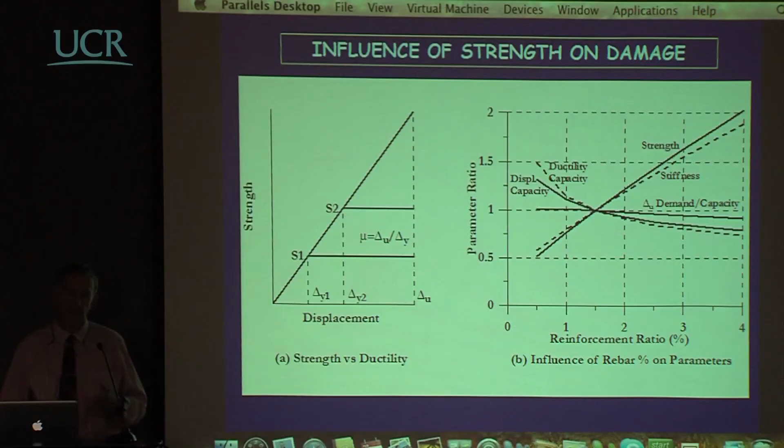Hardy Cross, a great American engineer, back in the 1930s said, in structural design, strength is essential, but otherwise unimportant. It's a real conundrum, but it's interesting. Strength is important, certainly, it's essential, but it's not important. The actual value you put into the strength has very little to do with the safety of the structure. And a design process that says to make the structure safer, double the strength, is irrelevant.

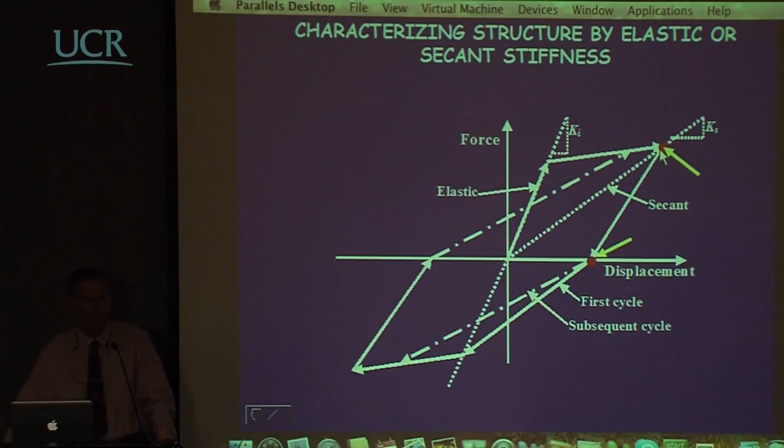And some value of elastic damping, 5%, regardless of the structural system. So we use those two values to try to estimate what this point here is. Wouldn't it be more logical to use a stiffness value which points directly to this maximum displacement response, and some level of damping which reflects the shape of this hysteretic response, to estimate this point? That's the essence of displacement-based design.

Performance-based seismic design methods - there are many of them. Displacement-based design in the form we're talking about is certainly the most developed, but there are other methods available.

One form is force-based, displacement checked. Sometimes called displacement-focused force-based design, where you check the displacements at the end of the design based on realistic estimates of stiffness, which you do know by then. But that's a pass-fail system - you just check to make sure the displacements are within the code level.

Another is deformation calculation-based design, where you design based on initial stiffness, put in the flexural strength, then add transverse reinforcement for the particular level of inelastic deformation in a given element - a rather complex system which we don't approve of. The third is deformation specification-based design, which is designed to achieve a specified displacement.

The rationale here is that if we are designing for a particular limit state, which we can characterize by a particular level of damage, then we go from that level of damage to the causative strains or displacements or drifts. We can go from that to the displacement, and then we can say, if we achieve this displacement, we have just got to that particular limit state, the performance limit. So a logical design approach, and clearly the most economical one, would be for a specified performance level to try and achieve in the design exactly that displacement. That's the way in which we are doing this here.

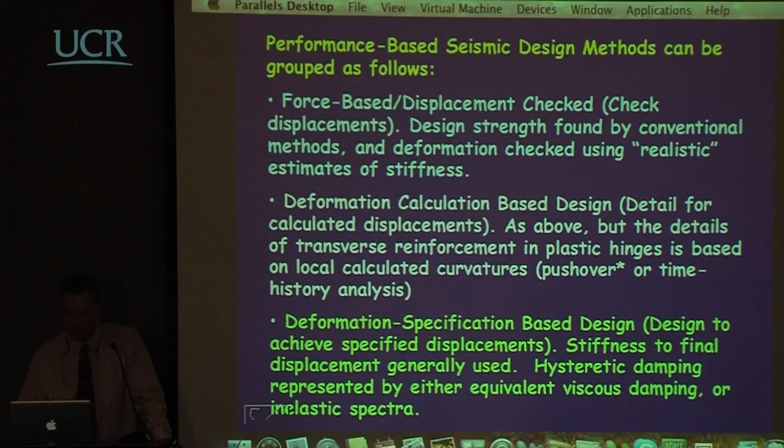Typically, we use the secant stiffness to the final displacement, and hysteretic damping is represented by equivalent viscous damping.

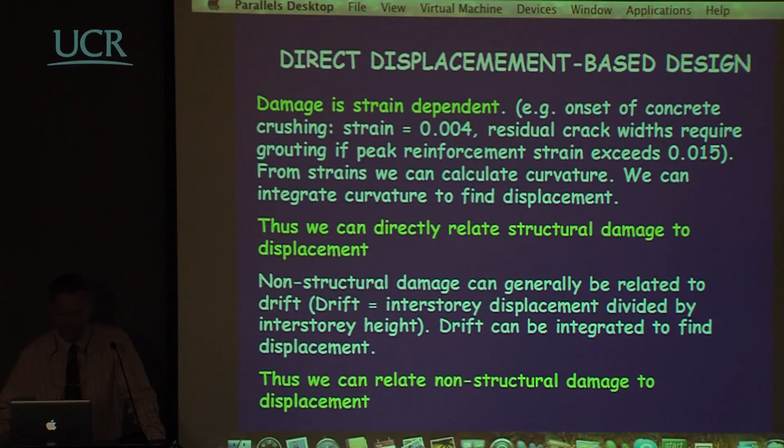We then say that the third piece of information is results that compare the displacement ductility, which we know at the start of the design process, and the structural system, and relate that to equivalent viscous damping. So if we know that we're talking with a concrete frame and we know what the ductility is, then we know what the equivalent viscous damping is.

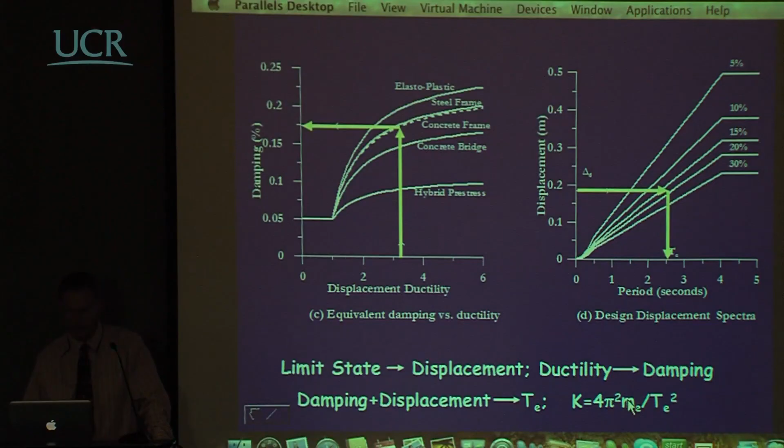If we know what the period is, and it's a single degree of freedom system, we can invert the single degree of freedom equation: T equals 2 pi square root of mass divided by stiffness. If we invert that, we know what this effective period is, TE, we've just calculated that. We know what the mass of the system is, therefore we can calculate what the stiffness is. If we know what that stiffness is now, and we know what the displacement is, then we know what the required strength is.

It's a very simple process which has not required any knowledge of the initial stiffness or of the analysis of the structure, which we don't know. So the procedure is to go from limit state to the displacement, from the displacement to the ductility, since we know what the yield displacement is. That gives us what the damping is. The damping and the displacement give us the period. The period tells us what the stiffness is, just by inverting the single degree of freedom approximation.

The required base shear strength at maximum design response, not at yield, is given by the stiffness times the performance displacement. So it's an extremely simple process.

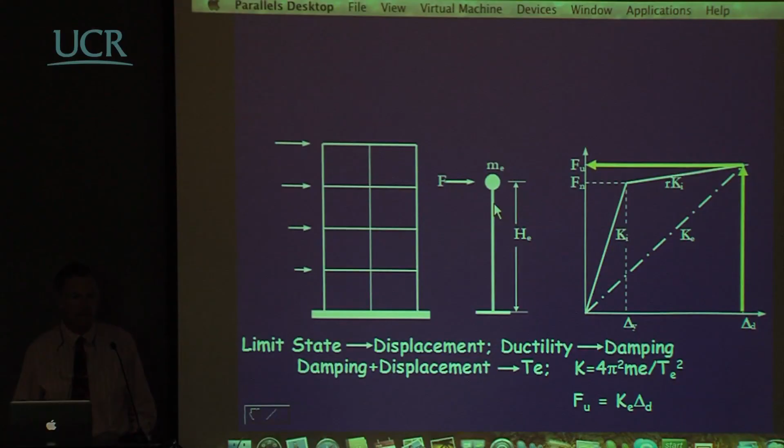The difficulties that come into it depend on different structural systems. How do we model them? In particular, how do we get from this structure to an equivalent single degree of freedom system? And then how do we cope with higher mode effects in terms of capacity design?

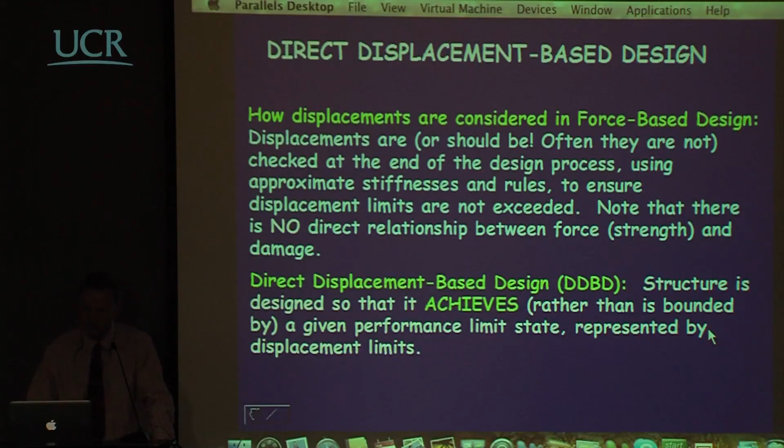In force-based design, displacements are considered, if at all, as a final process. In direct displacement-based design, the structure is designed so that it achieves, rather than is bounded by, a given performance state represented by displacement limits.

Force-based design uses an estimate of initial stiffness and elastic damping, typically 5%, to estimate the required strength and final design inelastic displacements. Then the strength is distributed to members in proportion to the elastic stiffness.

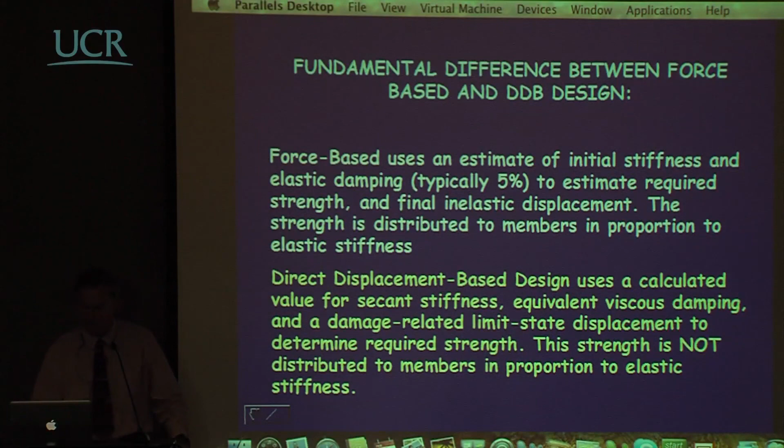The process we're using uses a calculated value for the secant stiffness, which is correct, equivalent viscous damping, and a damage-related limit state displacement to determine the required strength. This strength is not distributed to members in proportion to elastic stiffness. We'll go into how we do that in later sessions.

Let's just look at what this looks like in a very simple example. I'm not going to give all the details in this particular case, but it shows some idea of what we're doing.

We take an actual 5-story reinforced concrete frame, and we find that the effective height is about two-thirds of the building height. This gives us an effective height for this example of 9.25 meters. We design it for a maximum drift of 2%.

We'll find that in frame structures, almost always the code limit to design drift, which is dependent on non-structural damage, will govern. So normally that's what we will do—we will design for the design drift.

With knowledge of the effective height and the drift limit, we calculate that the design displacement is 185 millimeters. Because we can calculate the yield displacement as mentioned earlier, we calculate that the design ductility then is 3.25.

We calculate the mass from equations we'll give later. Approximately 80% of the total building mass is shown as 4,500 kilonewtons divided by G.

We calculate from expressions which we have what the equivalent viscous damping is. Here's the example shown here—here's the design ductility, here's the level of damping shown here, 17.5.

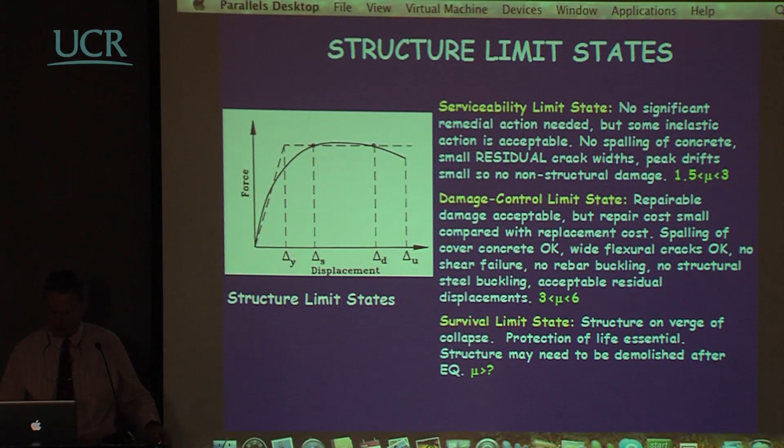I'll move through this quickly. Structural limit states—we've mentioned that we could be designing for serviceability limit states, damage control limit states, and survival limit states, and we provide information on the appropriate strains and drifts for these cases.

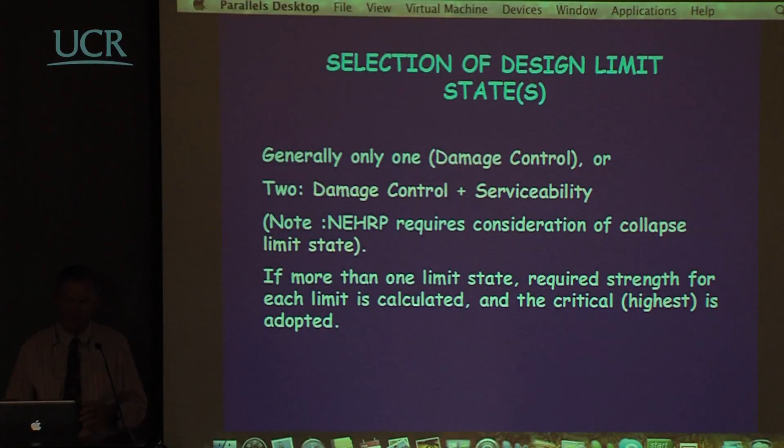Generally, we design only for one limit state, typically the damage control one, or perhaps damage control and serviceability. If more than one limit state requires detailed consideration, the required strength is calculated for each limit state and the highest strength of the two is adopted.